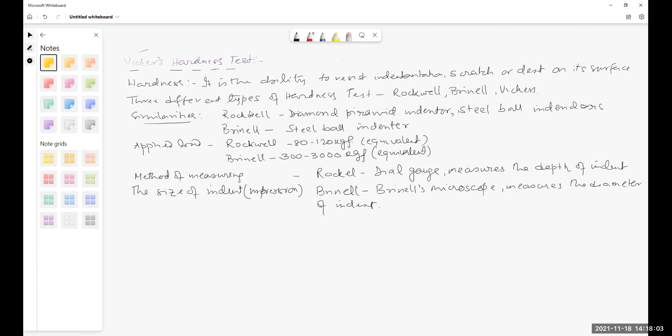Method of measuring hardness. For Rockwell, it is available from the dial gauge, directly as the dial gauge is calibrated accordingly.

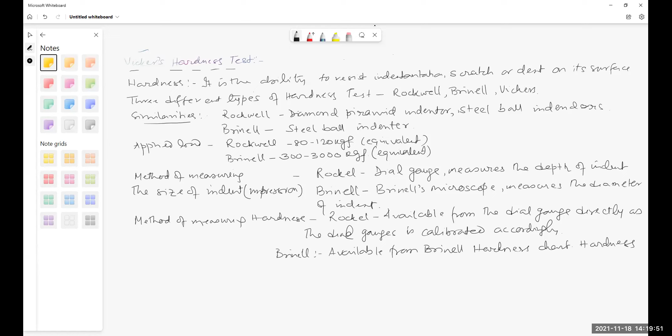What about Brinell? Available from the hardness chart. Hardness is available as per size of indent, load applied, and size of indenter.

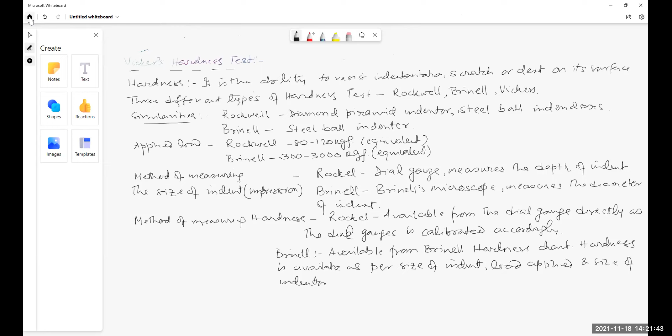Next, what about Vickers hardness test? Let us go through and discuss. Just 1 second. What is the Vickers hardness test?

It has certain differences. Here only one indenter is used, that is a diamond pyramid. So selection of indenter is not required. Here applied load varies from 5 kgf to 30 kgf.

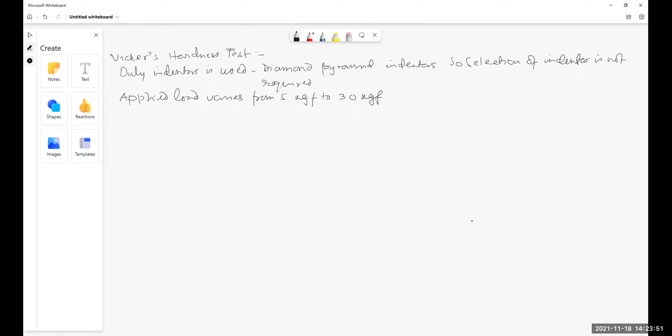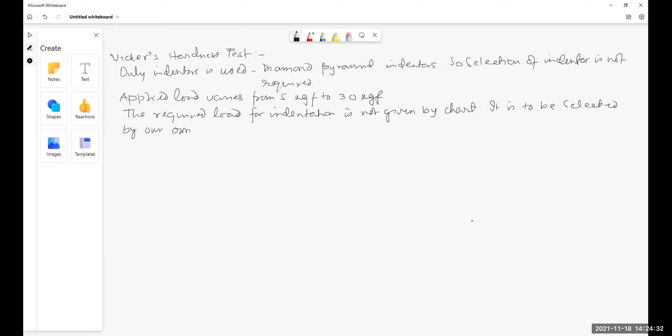But what is the required load? Required load for indent is not given by chart or so. It is to be selected by your own experience, on a trial and error basis.

Now, the indent created is measured by a combination of microscope, lens, and vernier. Here, the diagonals of indent are measured.

The average is consulted with the Vickers chart. The chart is selected as per applied load. It is the most accurate process.

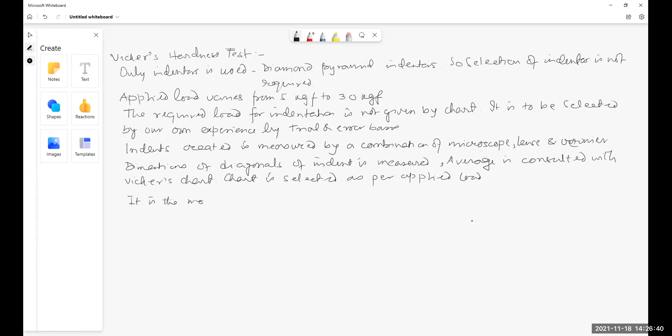As hardness can be measured up to 3 digits, with 1 micron accurate measurement of impression.

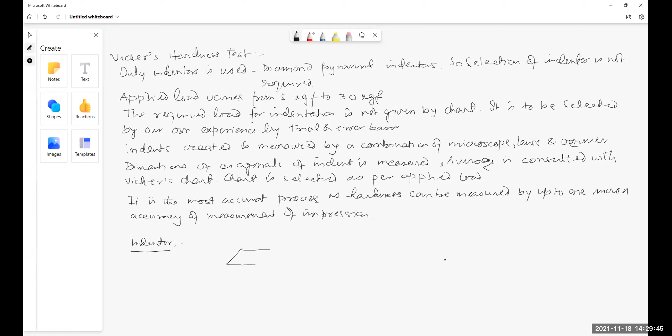A regular pyramid with square base and a sharp point made of diamond is pressed into the metal to be tested under certain load, which means its shape should be like this. It has an indenter. It is made of diamond. It has a square base like this, and it looks like a diamond itself. And this is fixed over a fixing bolt.

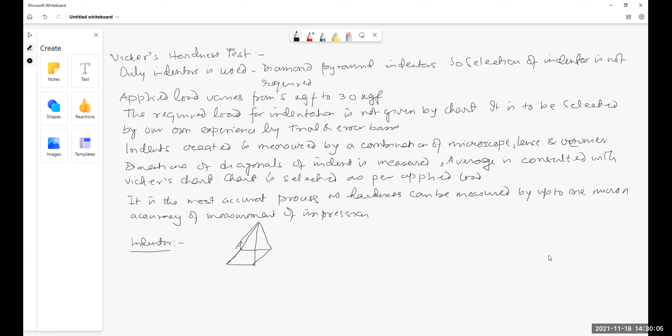The produced impression is thus focused on the front screen. There is a front screen in front of the machine where the diagonal of the impression is measured by means of measuring equipment. It can be adjusted by adjusting the knob of the vernier, which keeps a slide scale moving left to right and measures the dimension in three decimal accuracy.

Then with the hardness chart, we are supposed to find out the corresponding Vickers hardness. This is applied especially to small, hard and thin specimens, as well as determining the hardness of case hardened steel.

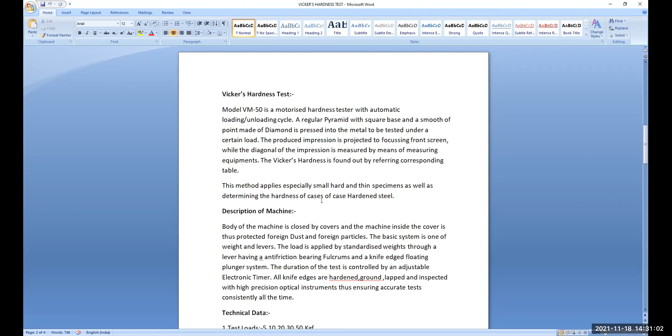The body of the machine is more or less the same. It's totally closed by covers in order to avoid entrance of dust and other particles. The basic system is one of weights and levers. By actuating the levers, different weights can be applied, so that we can create from 5 to 30 kg of pressure.

The load is applied by standardized weights, a lever having anti-friction bearing fulcrum and a plunger system. More or less, it is the same as the Rockwell hardness test. The duration of the test is controlled by an automatic adjustable electronic timer. Here, the time of impression can be adjusted by the timer itself. It will start after pressing a switch, complete the indentation and go back to the original position as per the time set on the machine.

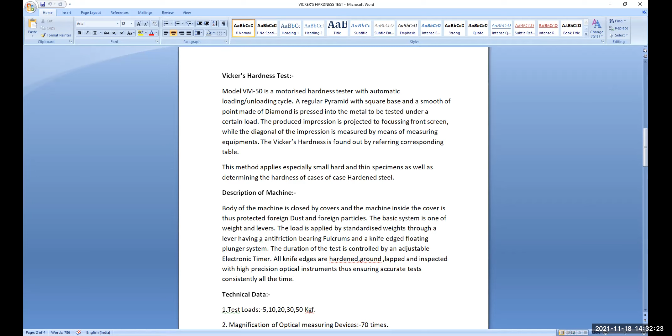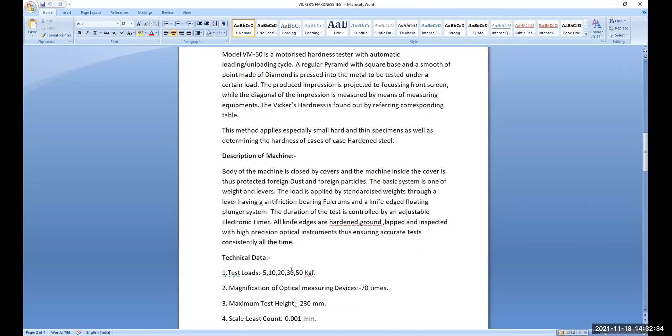All the parts over which this movement takes place are hardened, ground, lapped, and inspected with high precision optical instruments, making the accuracy possible consistently. Here we can have test load starting from 5 up to 30, and as high as 50 kg in certain machines.

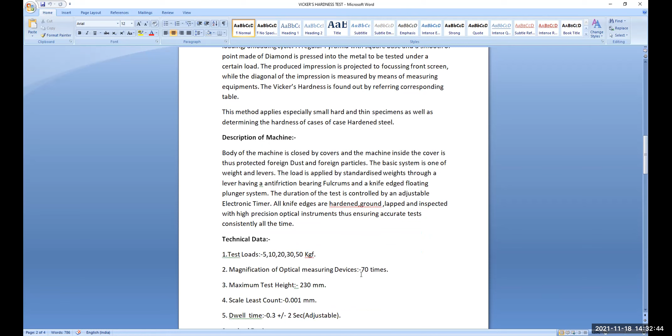Magnification by the optical devices is 70 times, the maximum test height can be 23 centimeter, and the scale least count is 0.001 millimeter. And dwell time in indentation is adjustable, about 0.3 to 2 seconds, for indentation itself.

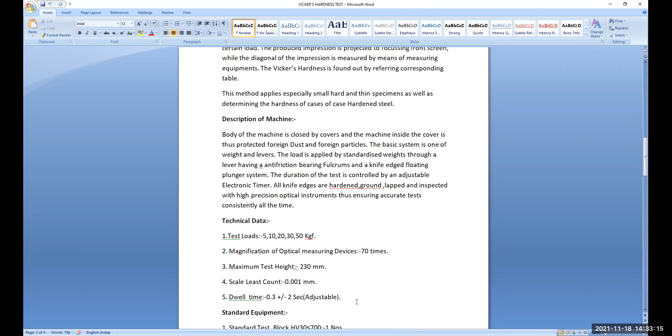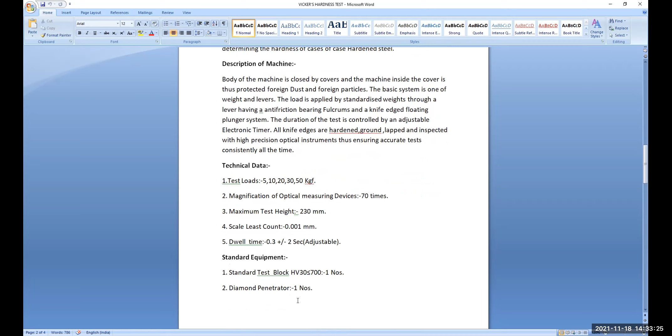But we have the standard equipment; we have nothing except the standard test block to measure the hardness of the standard hardness, and go through a diamond pyramid penetrator as well. Now, choices of loads for various hardness. I've told you just now, hardness testing is designed to carry loads of 50, 30, 20, 10, 5 kg in this fraction, not 11, not 16, not 18 like this.

This weight is selected through an indexing device, the weight selection knob, from outside. An optical device is given for projecting the impression on the front screen with 70x magnification, and it is capable of projecting a 1.2 millimeter impression maximum. Now, if the impression produced is a maximum size of 1 millimeter or 1.2 millimeter, this can be measured on this type of machine. And at most we have to make a 1 millimeter, 1.2 millimeter impression, otherwise it cannot be magnified for a visible measurement.

A micrometer thimble provided on the front scale measures the diagonal of the impression with accuracy of 0.001 millimeter. It is adjustable to select the load in relation to the expected hardness range of the metal in such a way that the impression produced should be near 0.500 millimeter across the diagonals as far as possible. So we have to make an impression around 0.5 millimeter across the diagonal as far as possible, minimum.

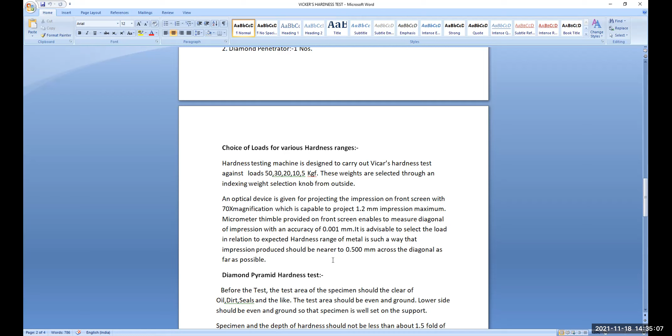Before the test, all the test areas of the specimen should be clear of oil, dirt, scale, and the like. The test area should be even and ground. The lower side should be even and ground so that the specimen will be set on the support. So here is also a table which can be adjusted up and down, and it's supposed to be fully clean of all sorts of oil, dirt, and scale in order to make the right seating of the material over the surface.

The thickness of the specimen should not be less than about 1.5-fold the diagonal of the impression. What will be the dimension? The depth should not be less than about 1.5 times, otherwise the diagonal of the impression will not be very clear. The load stages which are most frequently used are mainly 10, 30, and 50. Mostly we use 30 kg load.

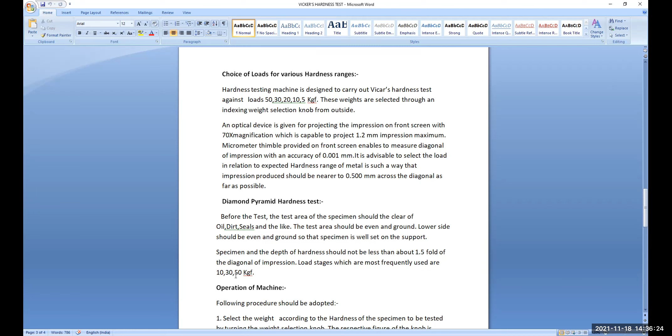The following step procedure should be adopted. Just one second. Select the load according to the hardness of the specimen to be tested by turning the weight selection knob. The respective figure of the knob is displayed on one side of the knob. For each weight it is calibrated and displayed over the knob, so you just rotate the knob and keep it to the baseline. With the baseline, you can select the load from 5, 10, 20, 50, and so on.

Now, first we have to place the specimen securely. Then the hand wheel should be turned clockwise so that the specimen will be focused on the front screen. At this time, generally as per our practice, we maintain a gap equal to 0.2 to 0.25 millimeter. Generally, we put a normal piece of paper between the indenter and the piece and see whether it goes up to that thickness.

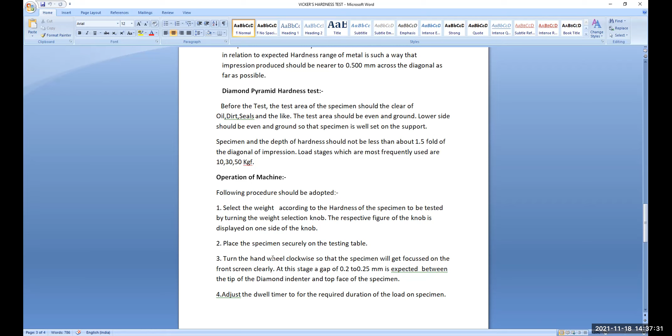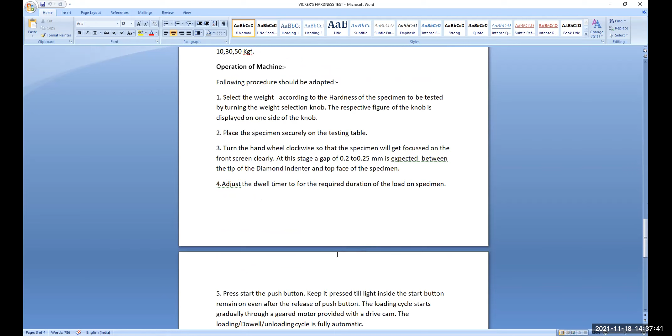Now, then we have to adjust the dwell time. Dwell time is to be adjusted for the load on the specimen. Mainly, the softer the material, the longer should be the time of holding the indenter on the workpiece. Now, after selecting the particular load, which you have to adjust as per your own experience, and after selecting the dwell time for this particular hardness according to your experience,

we have to press the push button. We have to keep it pressed till the light inside starts. The button remains on even after the release of the push button. So what you have to do, there is a green push button. You have to push it and keep it pushed so that a light starts glowing over it, and that light doesn't go off until the cycle is complete. Now, the load cycle starts gradually through a gear motor provided with a drive cam. The loading, dwelling and unloading cycle is fully automatic.

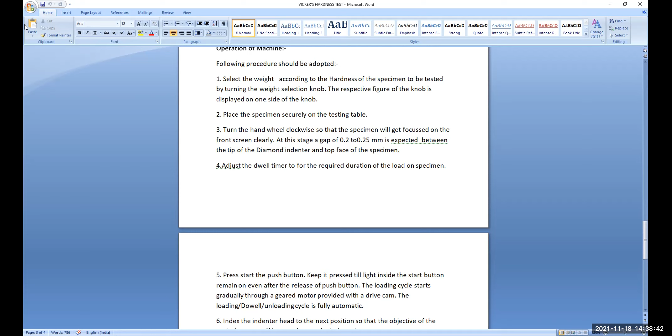Now press start. Keep it pressed till the light inside the start button remains on even after the release of the push button. Now the loading cycle, what happens? The loading cycle starts gradually through a geared motor provided with the gear drive cam. The loading and unloading cycle is fully automatic.

So you have nothing to do but to put the proper weight. You have to put the work over the machine and you have to put the indenter. Next, after doing so many things, you have to just press the green switch, and the machine is started. Now index the indenter head to the next position so that the objective of the optical system will be exactly over the indentation.

So it is sometimes difficult to bring the focusing glass just over the surface, because it is difficult to find out. So you have to raise the platform up and down to see whether the indent is visible on the surface in the display surface in front of you.

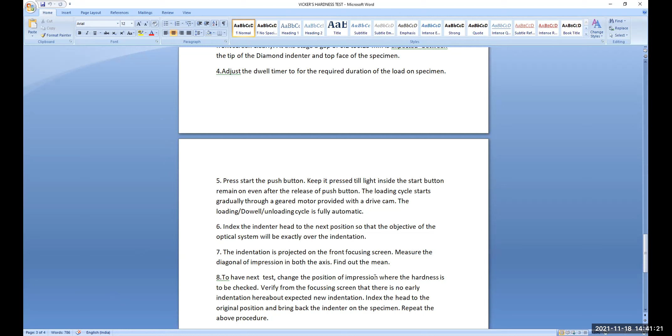To have the next test, first change the position of the impression where the hardness is to be checked. Verify from the focusing screen that there is no earlier indentation thereabout, except a new indentation. Hence, change the position of the indenter where the hardness is supposed to be checked, and ensure from the focusing grid that there is no preceding indentation thereabout, except a new indentation. Index the head to the original position and bring back the indenter on the specimen. Repeat the above procedure.

Now, Vickers hardness number. Vickers number or diamond pyramid hardness number, DPH, is determined as the load per area of the impression by the formula DPH = 1.854 P / d². P is the load applied to the pyramid head. d is the diagonal of the impression in millimeters.

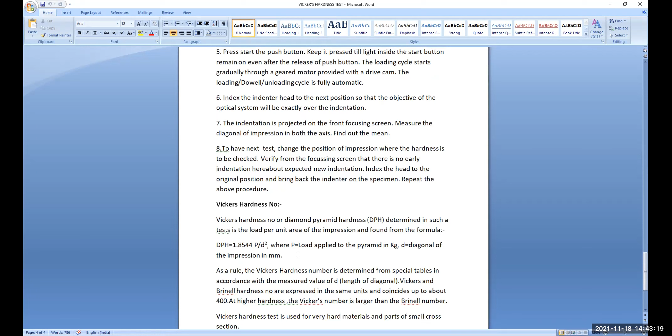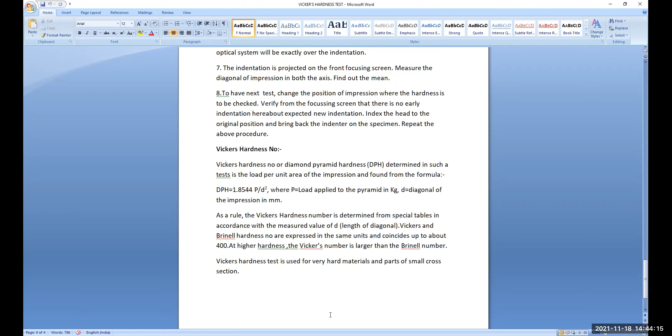Let us go for another equation here.

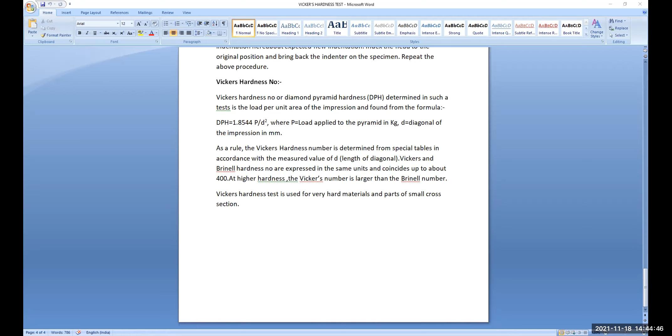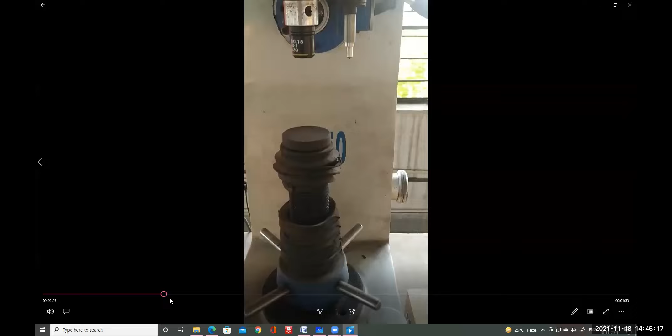Here we have our third hardness testing machine, which is known as Vickers hardness test. It has workpiece holding devices or carrying devices as shown here, over which the workpiece can be kept, and with the help of the rods shown there, the workpiece can be engaged with the indenter itself.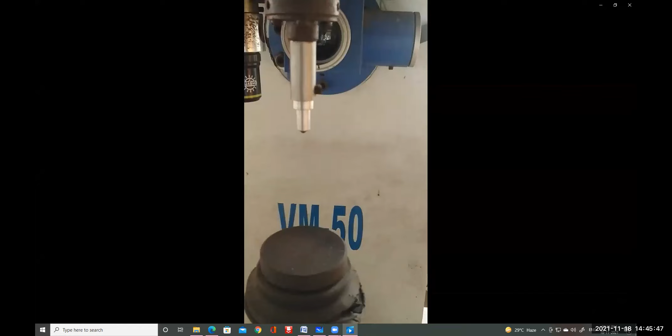The indenter here is only one indenter, one diamond shaped pyramid which is fixed here at the top, and after the indentation is complete, a magnifying glass is used here, just like this, to check the diameter of the indent, and it is focused and measured over the window kept here.

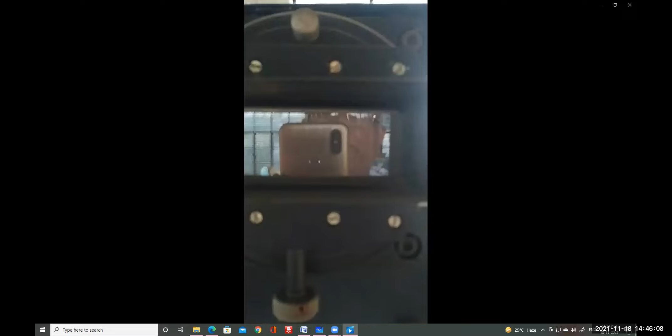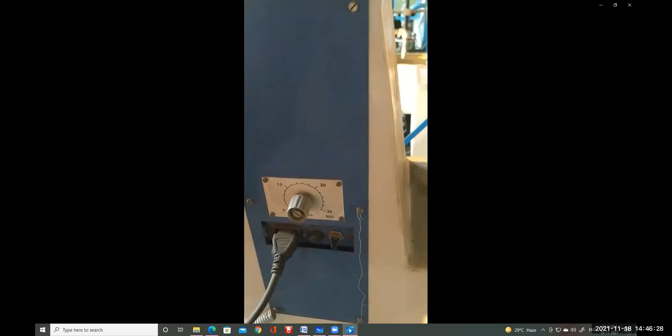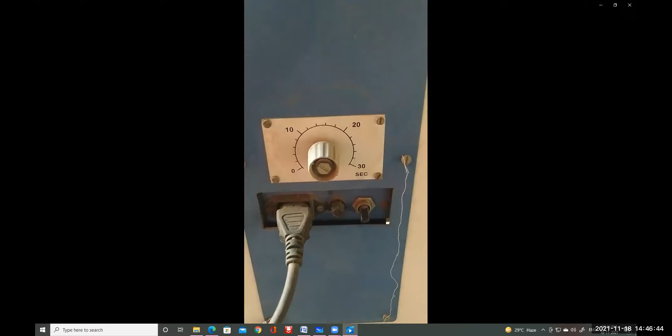Here in the front of the machine, we have one green switch which will glow when the machine starts, and one dwell switch will glow red for as long as the indenter is engaged with the workpiece itself. The dwelling period can be adjusted over a timer device, so up to 30 seconds maximum can be used for the dwelling of the indenter, so that this can be indented itself.

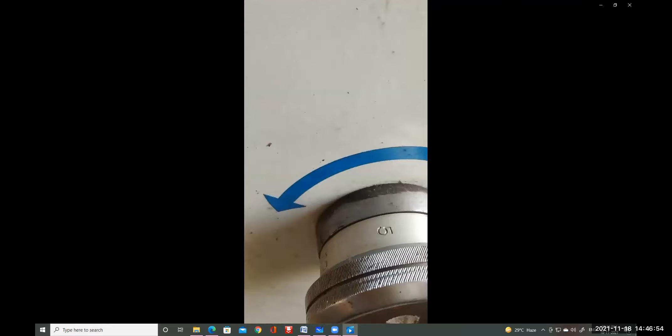We can set the load required as per our experience, which is shown in this device, in this rod, where 1, 5, 10, 20, 30 and 50 is the maximum load which we can select here, as per our requirement.